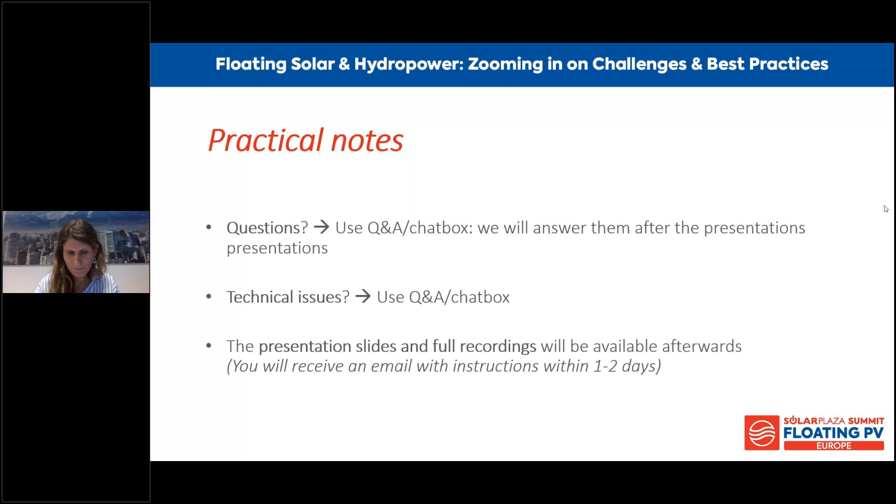But now I would like to introduce our speaker for today. It's Stéphane Prouvost. He is Division Director for Ciel & Terre. Hi, welcome, Stéphane. But I would like to say a few words about you first. He began his career in the marine industry and he joined Ciel & Terre in 2016 as European market developer. Then he went to India, where he's been establishing Ciel & Terre India. He also produced a 150 megawatt project, and he launched the R&D center in India that was focusing on new FPV designs. Right now, he's division director since 2021 and co-managing the floating project division worldwide.

So now, Stéphane, I'll let you take over and start with your presentation. Thank you very much. Thank you, Marjorie. Hello, everyone. I'm pleased to be connected with you today. So I'm just going to remove the video here. Okay, well, let's start.

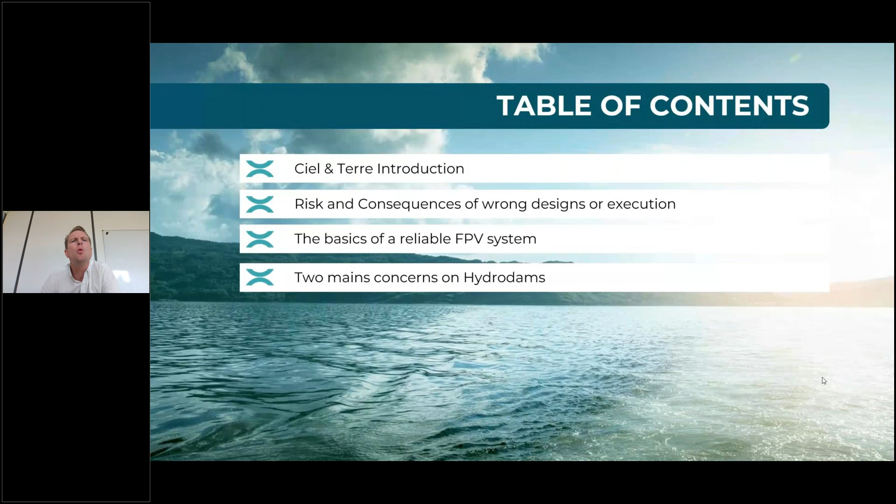So today I'm going to speak about the main technical challenges of floating solar on hydroelectric dams. I'm Stéphane, division director of Ciel & Terre. First I will briefly introduce Ciel & Terre. Then I will go to the risk and consequences of wrong design or wrong execution. I will then speak about the basics of reliable FPV solutions. Then I will jump into the two main concerns on hydroelectric dams.

So about Ciel & Terre, we commissioned around 300 projects in 30 countries for a total of about 1 gigawatt. We have 600 megawatt under construction, and we started our journey on floating solar 13 years back.

So we'll run a quick video now. Just drop me a message if it's not running correctly on your side, and I will just stop it and continue the presentation then.

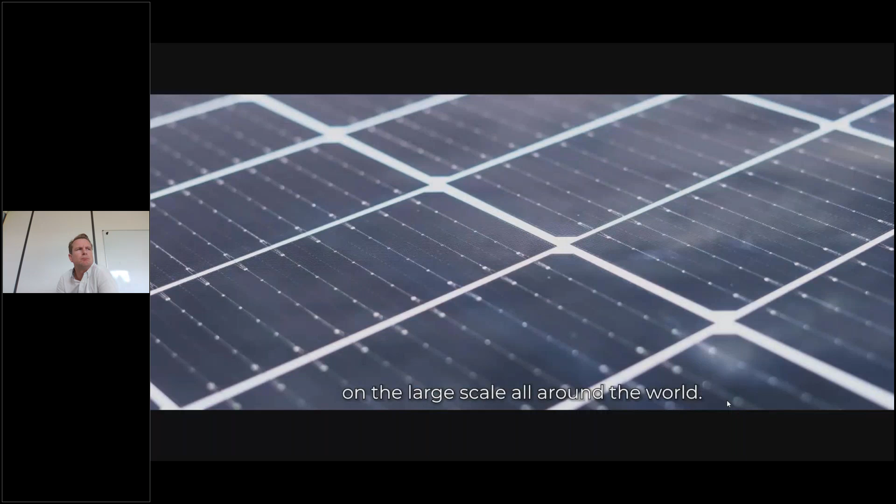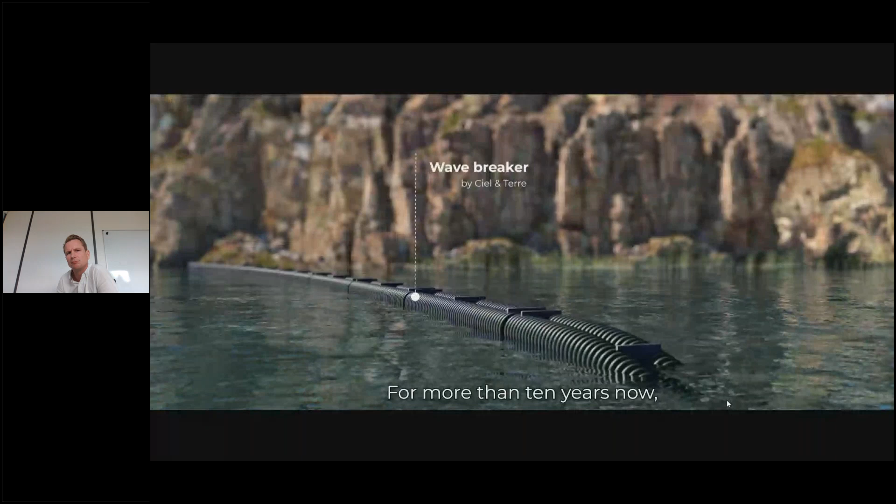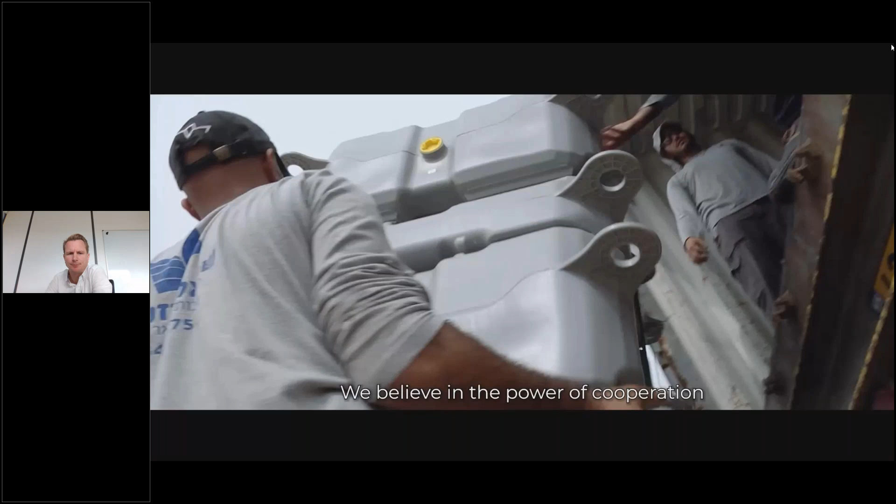At Ciel & Terre, we know that a sustainable world is still possible if we act now, on a large scale, all around the world. We make it our mission to deploy renewable energies and positively integrate them into the local environment. For more than 10 years now, we've been developing floating solar power solutions from design to distribution and installation. Because we know how much floating solar power has to bring, with its inland water potential estimated at 4,000 gigawatts. By using artificial ponds, floating photovoltaics solves land issues by preserving available areas, making it a smart renewable solution compatible with various pond types and activities. We believe in the power of cooperation and in the hybridization of talents to implement solutions offering ever greater promise and respect for mankind and biodiversity.

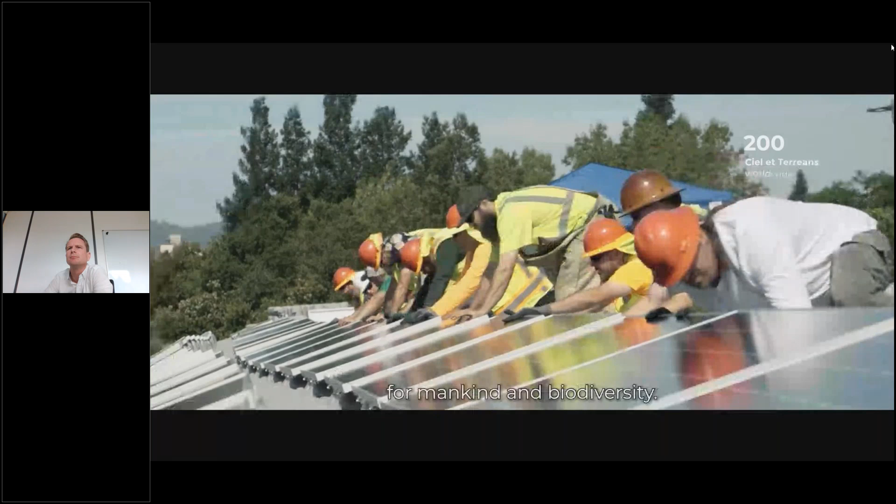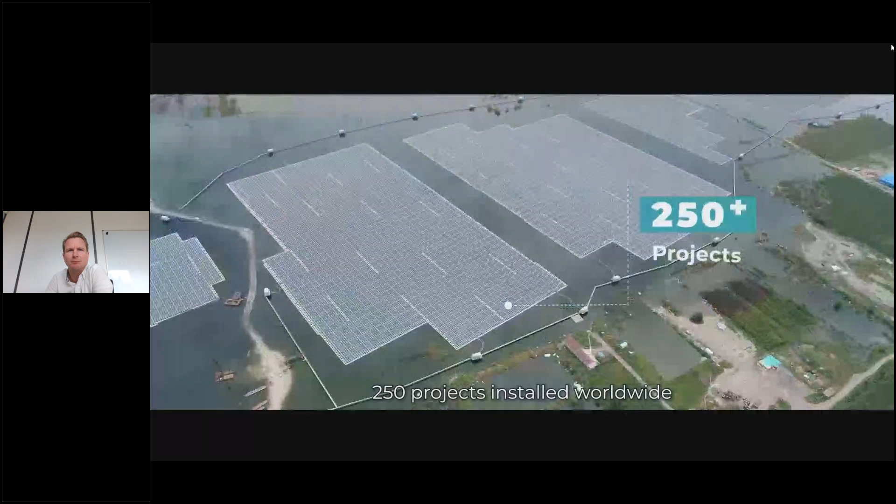It is by working with local partners spread throughout the world that we are able to build solutions that are both bold and diversified. With more than 250 projects installed worldwide, facing so many different conditions, from typhoon zones to high wave conditions, we have gathered a tremendous field of experience and technical know-how. This unique expertise makes us the world leader in the floating solar industry today.

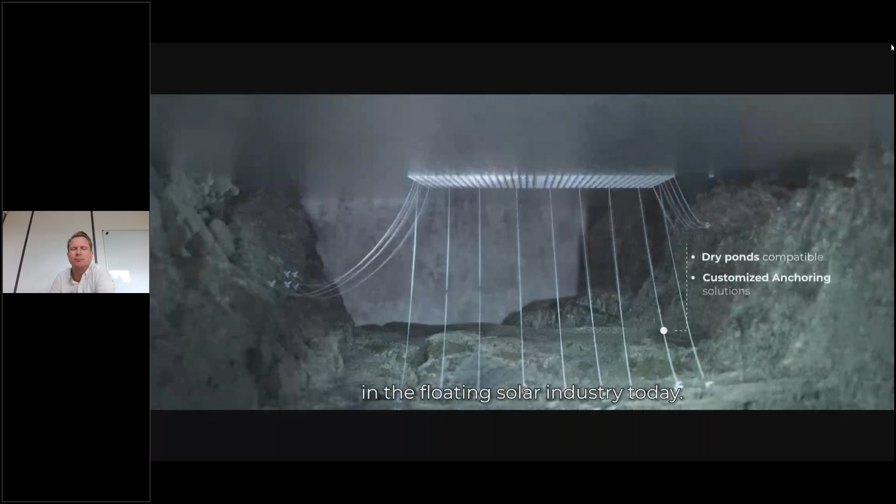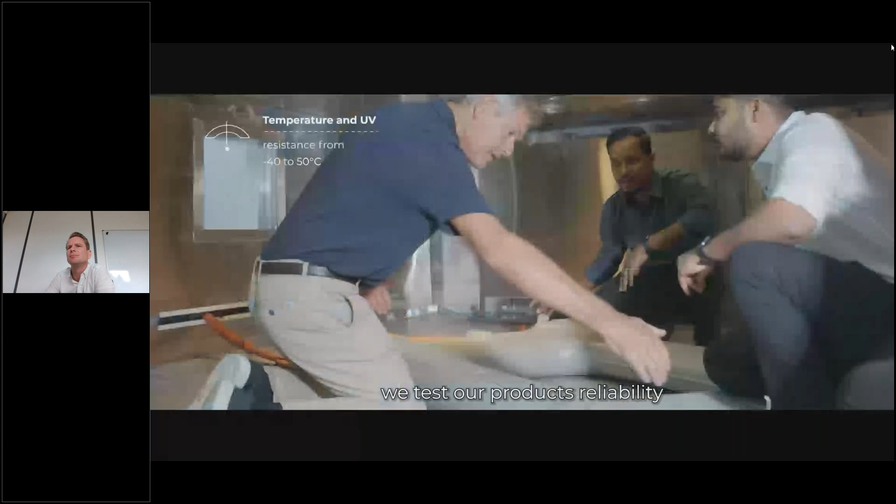But we will keep on taking on new challenges, because we believe in continuous improvement of our solutions. In our own laboratory, we test our product's reliability, setting durability criteria above the market standards and challenging our processes. We innovate with passion to open new, promising pathways, offering ever greater respect for both humanity and biodiversity, striving to optimize our solutions, our advice, our support.

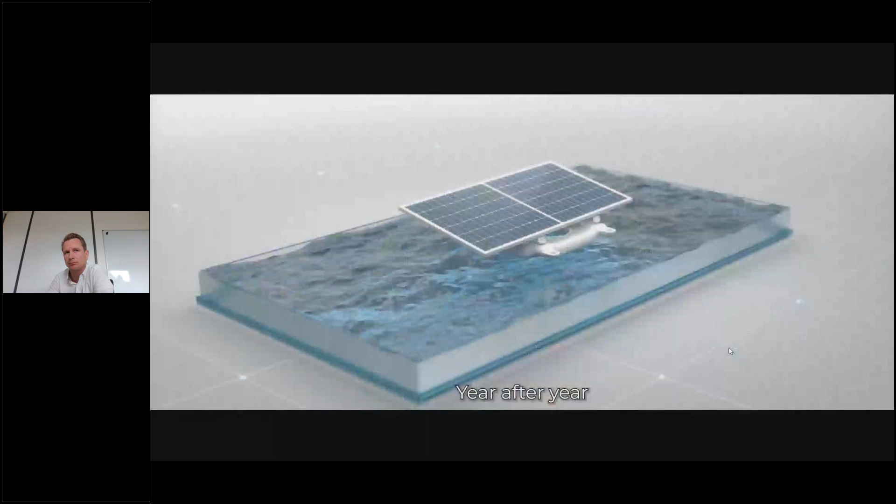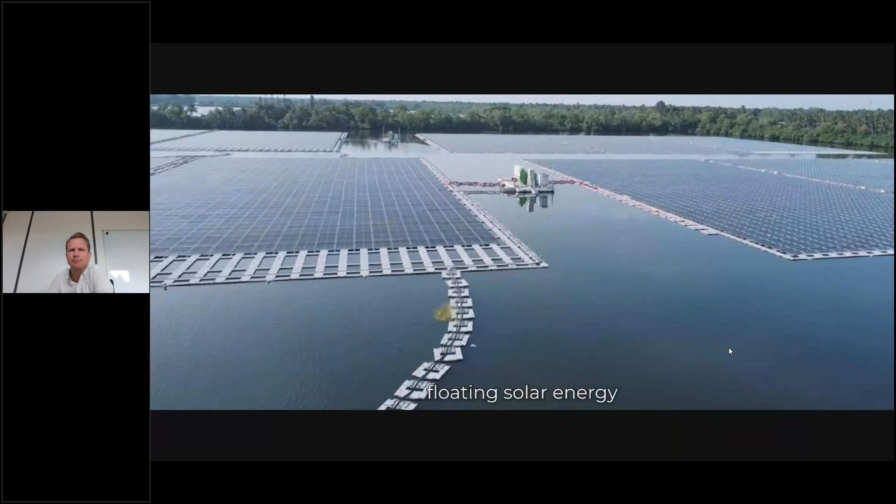Year after year, we challenge our products, our designs, and our mindset to meet new needs, to be more and more in harmony with the environment. We are ready to drive the floating photovoltaic market and deploy floating solar energy for the sake of our future. We know that solar power still has a lot to give, and Ciel & Terre has a great role to play. Join us in our human solar.

Yes, Stéphane? Yes, I'm trying to change the slides. It's not working for me now. I'm blocked. Okay, we will do it again. Just sorry for the people following us. It's gonna be back on track. Yeah, it's gonna show in a second. Okay, yes, all good. Thank you, Marjorie. I take the control. All good.

So, at Ciel & Terre, we did actually 6 projects on hydroelectric dams. The first one we did is in 2016 in Portugal for 200 kilowatt peak. We did another project in 2018 in Japan. It's 11 megawatts, called Yamakura Dam. Then we did in 2019 in Brazil a 1 megawatt project called Sobradinho.

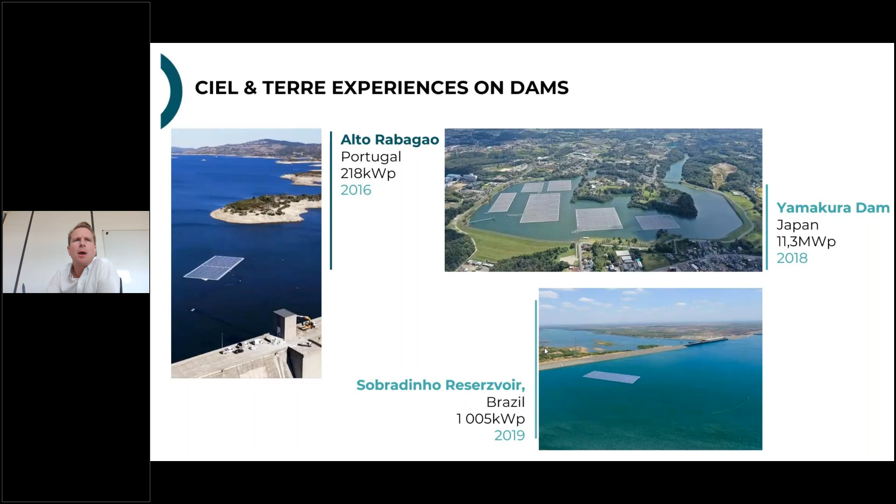Last year, we did a project with EDF in France called Lazer Dam, a 20 megawatt project. Then early this year, we did 7 megawatts in Brazil, called the EMAE project. And recently, we just commissioned a 120 megawatt project in India.

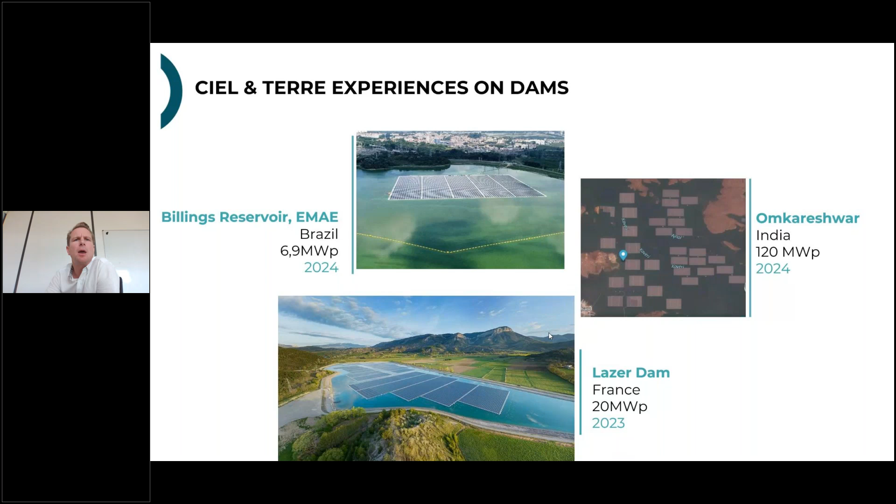So now I'm going to speak about the risk and consequences of a wrong design or wrong execution. So first, consequences could be a loss of generation. This could happen due to micro cracks on modules. It could occur when you place torsion on the panel or when you have water splashes.

Also, those losses of generation could happen when you have poor cable management or even a wrong module tilt, especially when you go for more than one in a row configuration, because you have extra buoyancy from the maintenance alley. So this could impact the tilt of the floats and then the tilt of the PV module.

So the consequences could also be an extra OPEX. This is due to component replacement, such as the PV panel and DC cable. Also, it could happen on the string inverter if you place your string inverter on the structure, as well as the PV panel fixation system, for instance. So yes, it could have a significant impact on the OPEX.

Also, a consequence could be water pollution. This could be due to a wrong polymer formulation, especially if you use a wrong UV stabilizer. We have what we call the chalking, especially on polypropylene parts. After a certain duration, UV starts to impact the polymer. And then you have this powdering forming on the outer surface of the part, and those powders are dropping in the water and polluting.

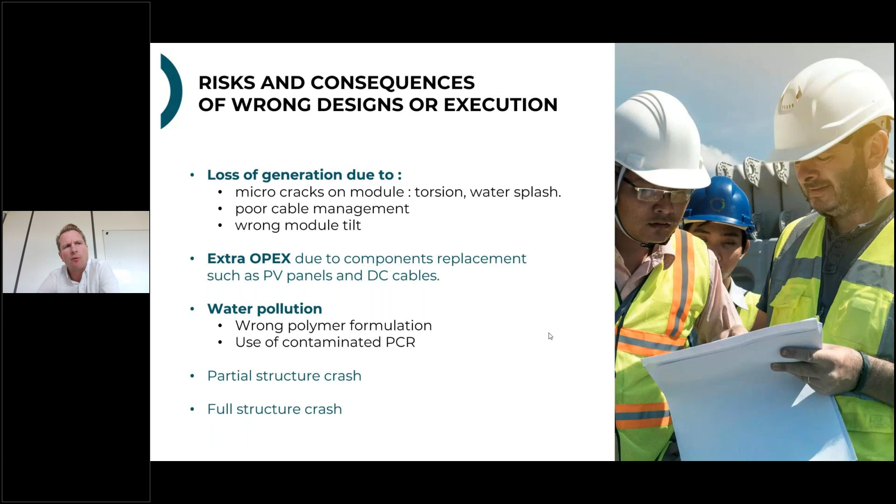And knowing that it has to last for 25 years, we think that it will even increase. The percentage will increase. Now it's about 4%, but we can extrapolate for 25 years, and I think that we'll have more than 10% of big damage in the coming years. So I just wanted to highlight the risk here. When selecting the technology for your project, please be extremely careful.

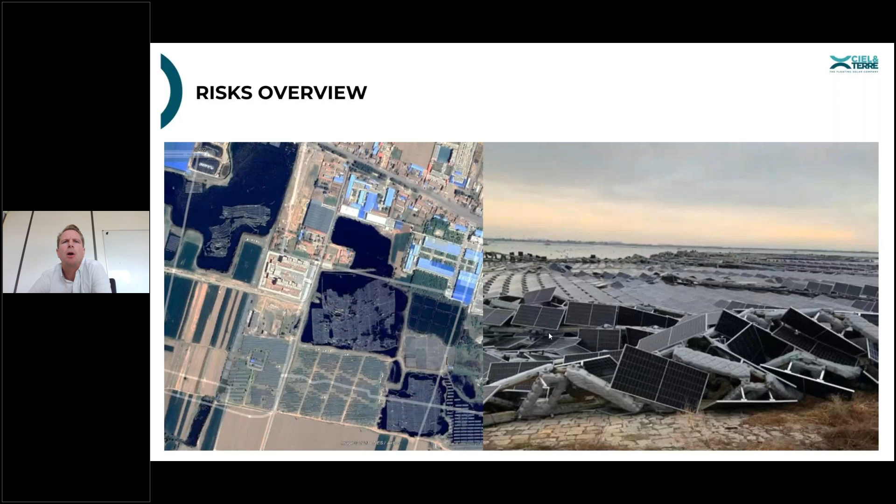So here, the failure point. We see often that the failure point is the connection between the floats or even the connection of the mooring line. Why? Because you have high concentration of loads. So it could happen here. We see a picture of one of our competitors.

On the mooring line, we see a picture here of a steel mooring line. And we see after already 3-4 years, if it's not protected correctly, we see high corrosion, and the cables are breaking. Same for the ropes. We see internal abrasion. So in Ciel & Terre, we do select carefully the fibers to be used.

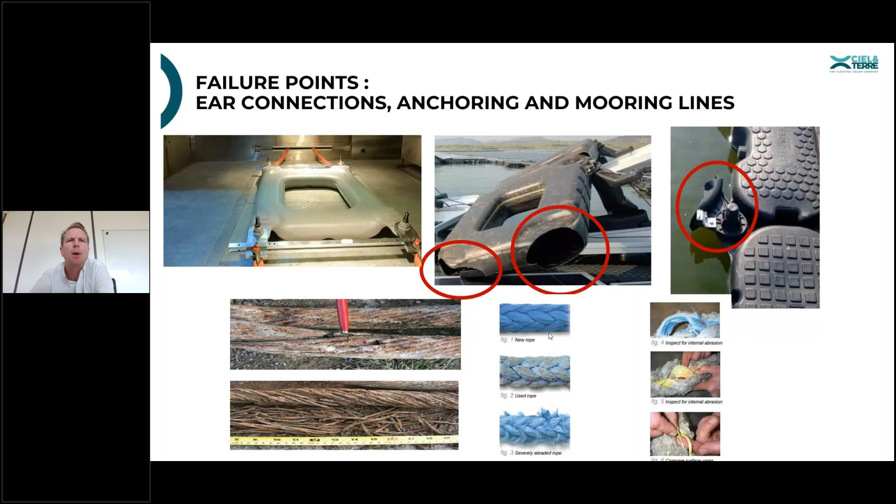So what are the risk consequences of wrong design and execution?

So, sorry, I think it's lagging slightly on my side.

Yeah. Okay. Just to say that we need to qualify the product to ensure a good project, quality project. So I wanted to say that the theoretical calculation is not sufficient. We need to assess with physical tests to understand the limit of the design, the limit of the product you have. So we see on the top left picture that this is inside our lab.

We see in the middle here that we have a panel fixation test. So here we are pushing and pulling on the PFS. What we call the PFS is a panel fixation system, for millions of cycles. We have all those cycles mostly from the wind, also the waves. So we need to analyze what is the fatigue of this fixing system on the float itself.

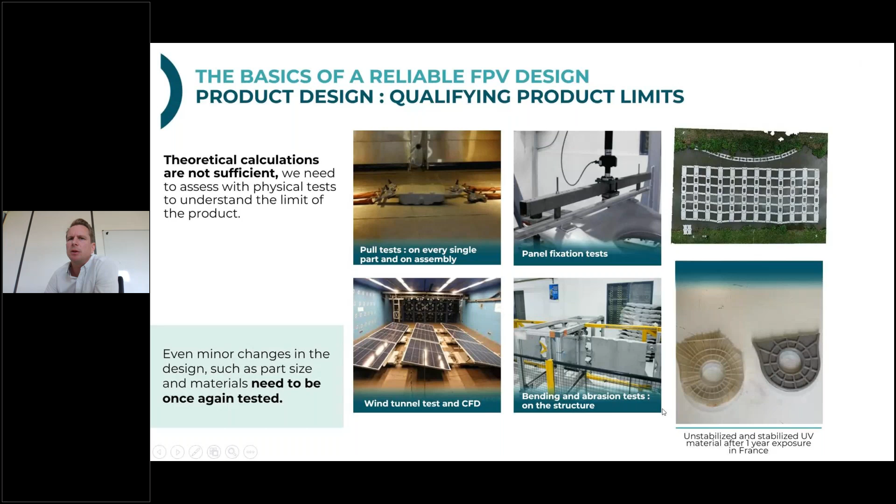On the bottom right here, I will run this quick video. I'm not sure. Yeah, is it working? Yeah. Wow, we can't see much.

Actually, just to highlight the importance of having the right UV stabilizer. You see that only after one year, if the material is not properly stabilized, it's becoming really brittle and it can easily break.

Okay, video is not working. Fine.

So yes, even minor changes in the design, such as part size and material, have to be analyzed once again. You can't just simply change the design and assume it will work. You need to test.

Okay, next slide. I would like to go to the next slide. It's not moving on my side.

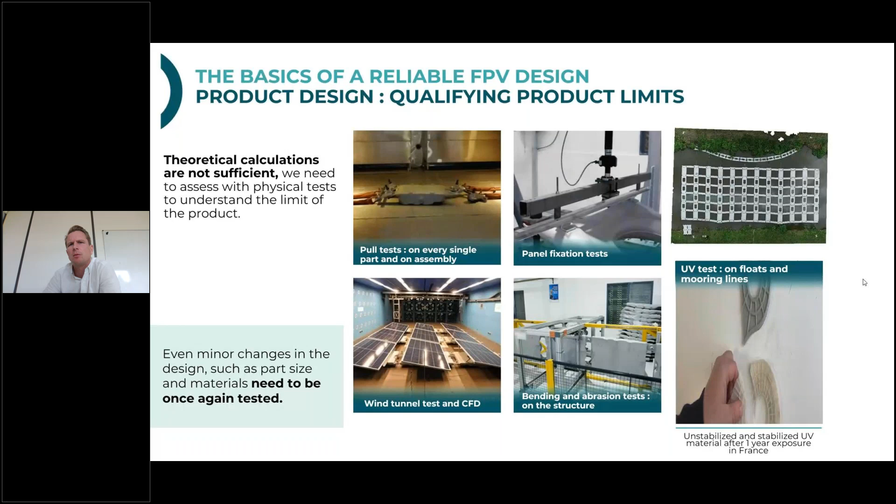Okay. Yes, this is about the project design. Because first you need to understand what is the limit of the product, but then you need to adapt the product to the site, see what constraints you have at the site and make sure that your product could fit that specific site. So at first you have to evaluate for this site what is the environmental load to be considered.

So yes, selecting the right wind return period, the right wind speed reduction, because often the wind speed is at 10 meters high, but you need to reduce it to the panel height, which we often consider 1 meter in Ciel & Terre.

Also, one big parameter is the gust wind. We see that gust wind has a big impact on the wind to be considered. Whether you go for 30 seconds, 10 seconds or 3 seconds, it has a big impact on the maximum wind to be considered. So this is for the wind.

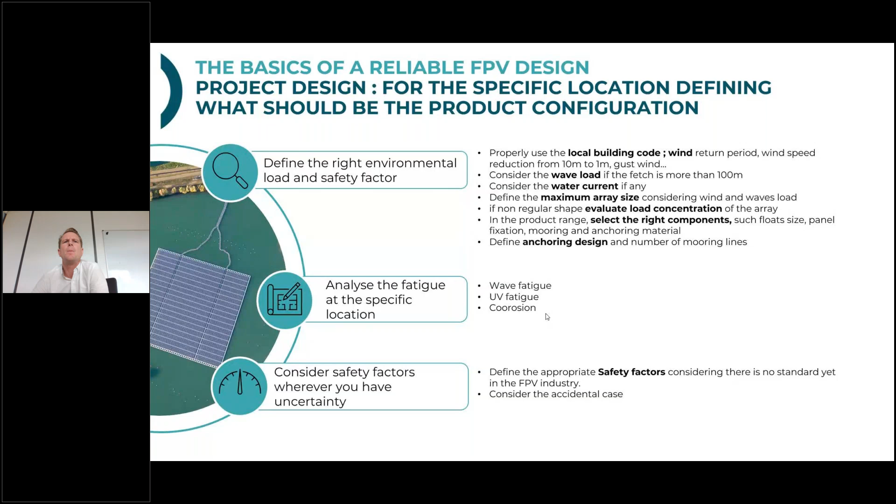When it comes to project execution, of course, you need to follow the manual instructions. We often see that subcontractors of our customers are not always willing to do it. They want to save time or money, so they compromise on quality. So it's extremely important. Another extremely important point during project execution is to minimize the construction time of each array to avoid temporary anchoring for a long duration.

Why so? Because if you face high wind speed during construction, you have only temporary mooring lines, and you connect only a few fixing points on the array. So if a high load is applied, mainly due to the wind, it will be too high and the temporary mooring lines will break. So it's extremely important to be fast enough to avoid any big crash during installation.

Of course, we have to ensure that all components and materials are the same as those mentioned in the datasheet. We see competitors incorporating recycled material during manufacturing. Why so? Because everyone is trying to save costs. So as a customer, you should be careful. You should control what your supplier is doing during manufacturing.

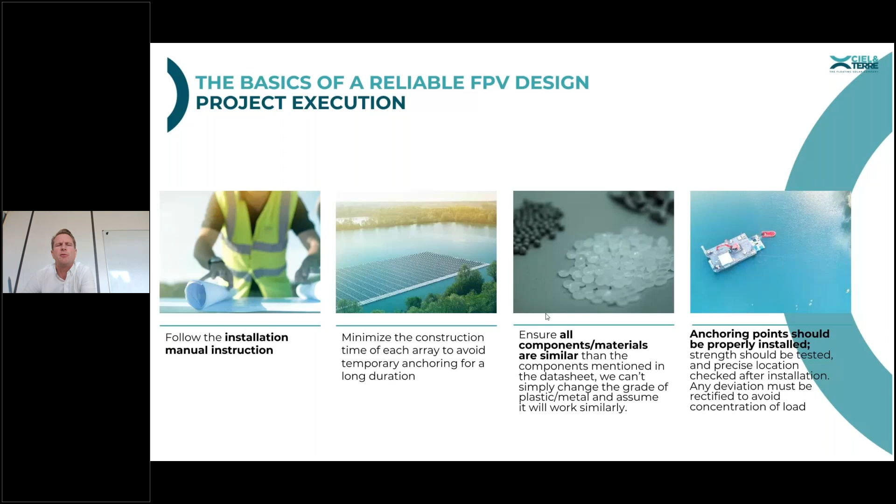The last point I wanted to highlight for project execution is the anchoring. We always check that the anchoring points are at the right location. If you don't place the anchor at the right location, you are overloading a few mooring lines, and you need to ensure good distribution of the load on every mooring line. If they are not all aligned, there is overload on certain mooring lines while others are not working, and it could obviously fail due to that issue.

So I will now go on to the two main concerns on hydroelectric dams.

Stop the video. Yeah.

Sorry. So often on hydroelectric dams, we always see this big reservoir. It's an extremely big reservoir. For instance, on the picture here, this is in Portugal, the Alto Rabago project. There is a really big distance between the shore and the dam, what we call the fetch. This is 7 kilometers, but often we can see even more.

In big projects, big hydroelectric dams, we see like 20 kilometers, 30 kilometers, and this leads to big waves, mainly due to the wind, because when it's blowing here, for instance, from the east side or northeast side, then you have accumulation of waves due mostly to the wind.

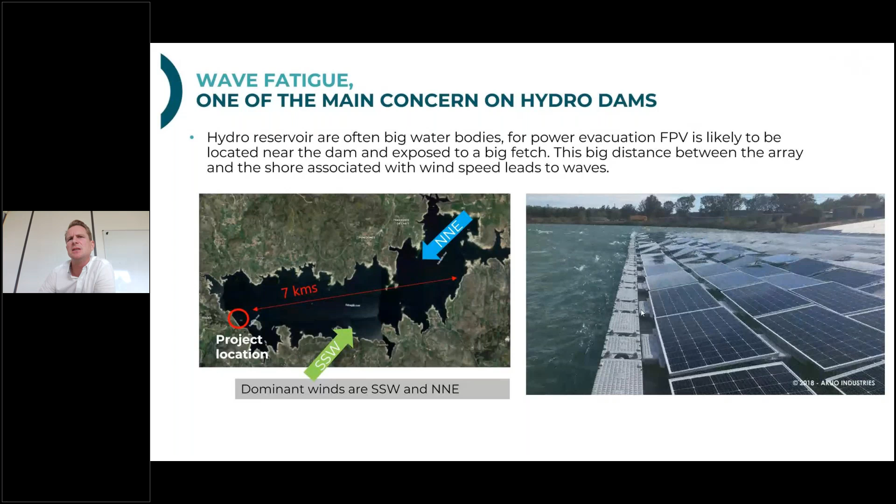So you can see quickly here on this video on the right side, if it's working for you. You see a lot of movement, right? Because it's a flexible structure. And of course, this leads to fatigue after years. So for that, we need to analyze what will be the fatigue after 20 years.

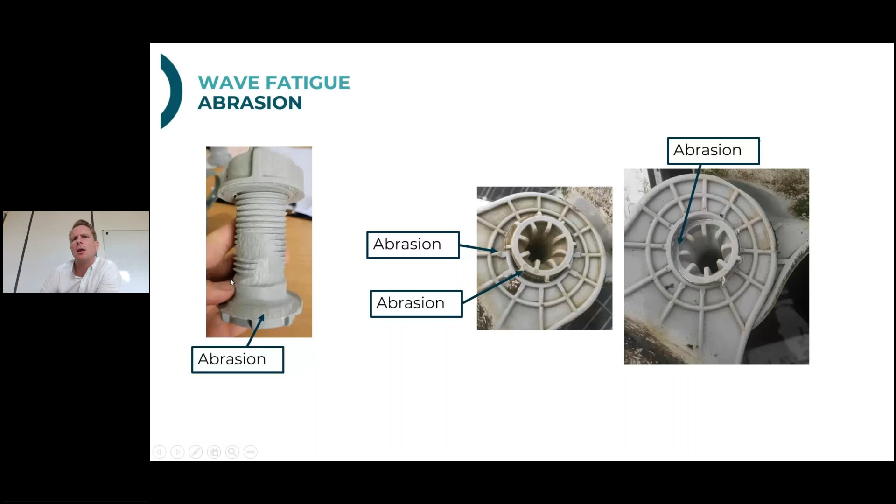So this is the kind of damage that could happen if you are not careful enough, if you are not protecting the array, the structure itself. We see important abrasion happening on those screws, what we call the connection pin, and also on the connection point, the ears, which are connecting the floats together.

Also, we see cracks happening, cracks on the ears, because you have compression stress on the upper side and tensile stress on the bottom side. So when you have millions of cycles like this after years and years, the material gets damaged with too much stress on it. So yes, this has to be analyzed also.

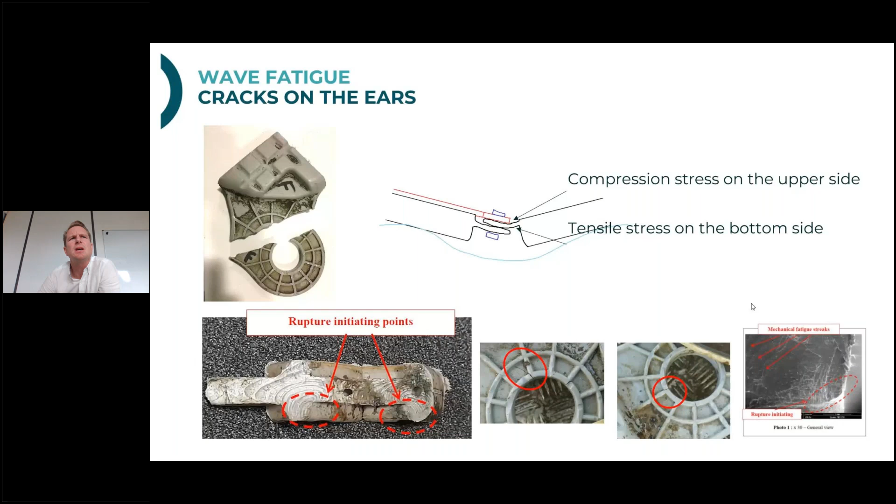Sorry, about the wave fatigue here in Ciel & Terre, what we do, we try to predict what will be the damage. So we consider the inputs from site, so the wind speed, the wind direction, the wind occurrences, and the associated fetch. According to that, we can evaluate what is the wave spectrum, and then calculate the float movement and angle.

Thanks to our lab fatigue test results and the experience we have on other FPV installations, we can predict the damage. So we see on the bottom left here the number of cycles. This is what we do in our lab with a specific angle, and we see how many cycles we can apply before the ears are breaking.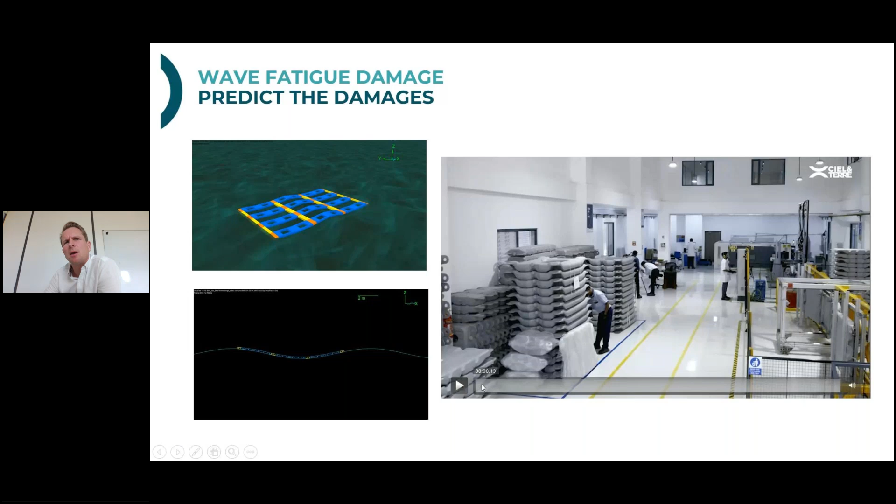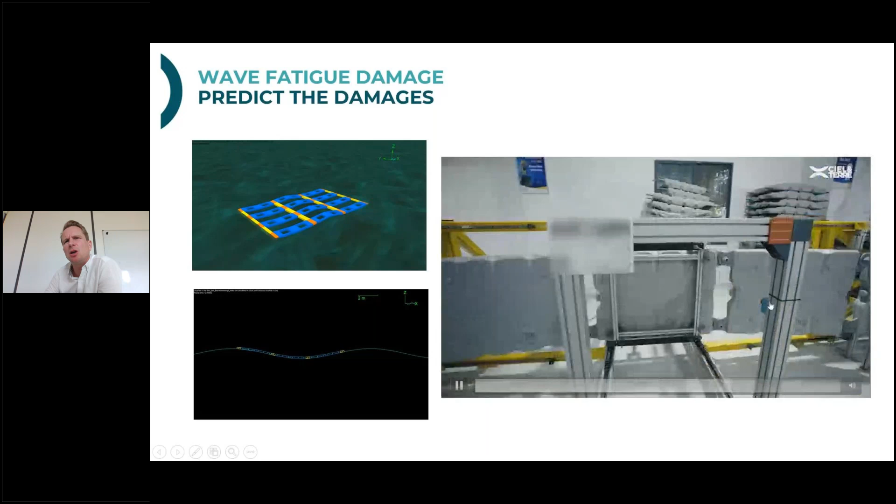Yes. Okay, and here we see our lab, where we have a machine. Let's see if it's running. Okay, so we have this here. We apply millions of cycles on floats. So we connect floats together, and then we have a piston where we apply millions of cycles with a certain tension on the float, to understand what is the fatigue with a certain angle and certain number of cycles.

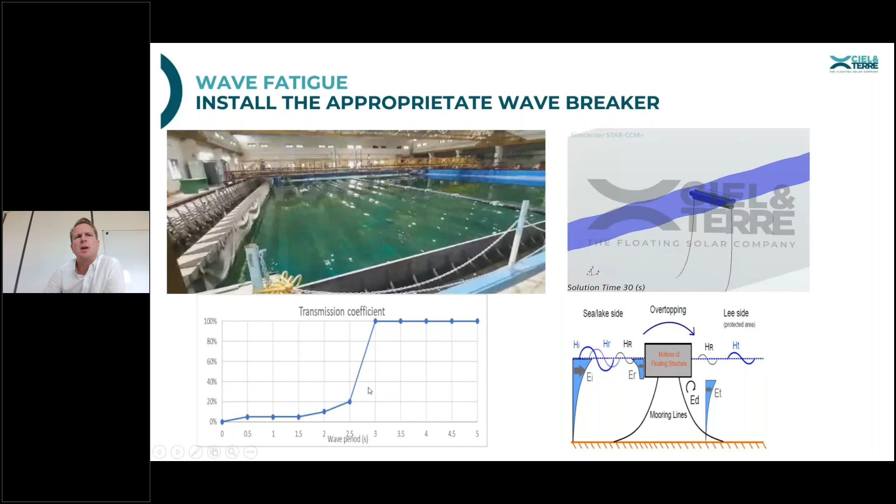When designing a wave breaker, there are different parameters to consider: the pattern configuration, the draft and the depth, and the weight of the wave breaker also has an impact. So we consider all of that when designing our own wave breaker. Why does Ciel & Terre design our own? Because it's difficult to find a competitive floating wave breaker with good efficiency, so we decided three years back to develop our own solution.

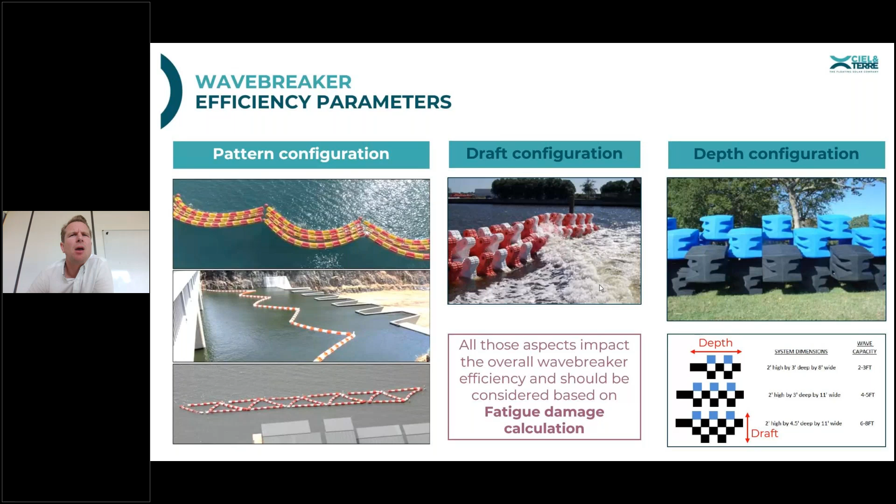The second challenge for hydroelectric dams is the anchoring. First, we have high water depths, and when you have high water depths, you can't use normal techniques. We used to do anchoring from the top surface, having a barge and placing screws with a mast from the barge down to the bottom of the reservoir, but when you have high depths, you can't use those techniques.

So that's why you need to use robotics, and for that it's a bit specific, which complexifies the process.

Also the high slope. Hydro dams are often placed on what used to be a valley, so you have high slopes at site. Placing a big dead weight is not reliable — we see that it's sliding when you have a high slope of 20% or even more. Then with the tension on the mooring line, it could slide the dead weight, so you need a specific technique. At Ciel & Terre, we screw or rock bolt our anchors to avoid any slide of the anchoring point.

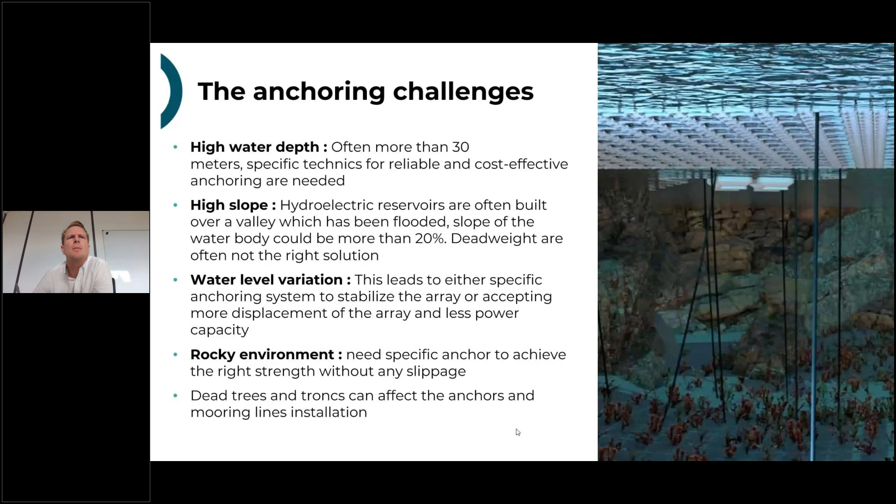One last point, pretty important to consider, is the uneven bed of the reservoir associated with water level variation. Why so? For instance, on the right side picture, when the water level is high, you see a good distribution of load on both mooring lines. But when the water level goes down, the bottom line gets loose, meaning more load is applied on the top line. And if there's too much concentration of load there, it will fail.

So this is extremely important — we do complex calculations and use specific software to define the right location to place the anchors.

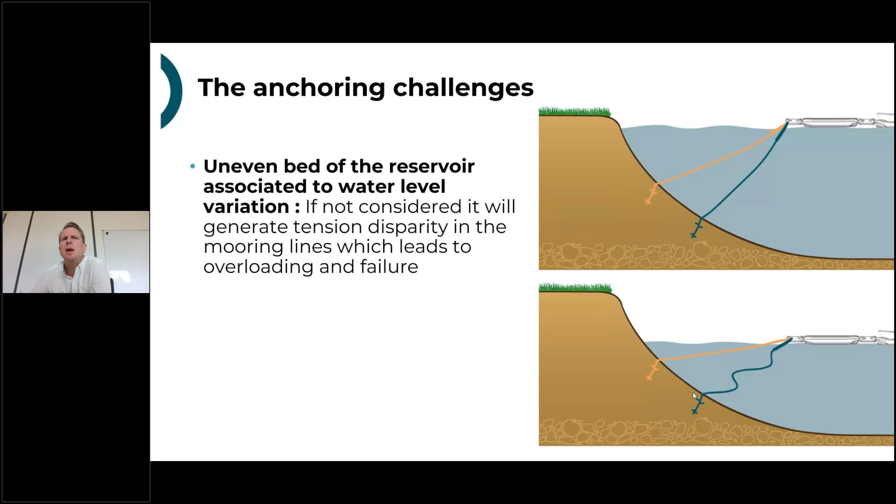Now I'll go to the conclusion. FPV on hydro dams is surely a great idea, especially because there is such potential on hydroelectric dams — it's such a big water surface that we can make gigawatts of projects there. However, there are many technical challenges to ensure the integrity of the structure for 25 years and even more.

Not yet finished — to define the right floating structure, we need a proper fatigue analysis. This is extremely important; each site is specific, and we need to carry out proper analysis and studies. Final point: when the distance between the array and the shore is big, the installation of a specific wave attenuator should be considered. Okay, I think that's it on my side.

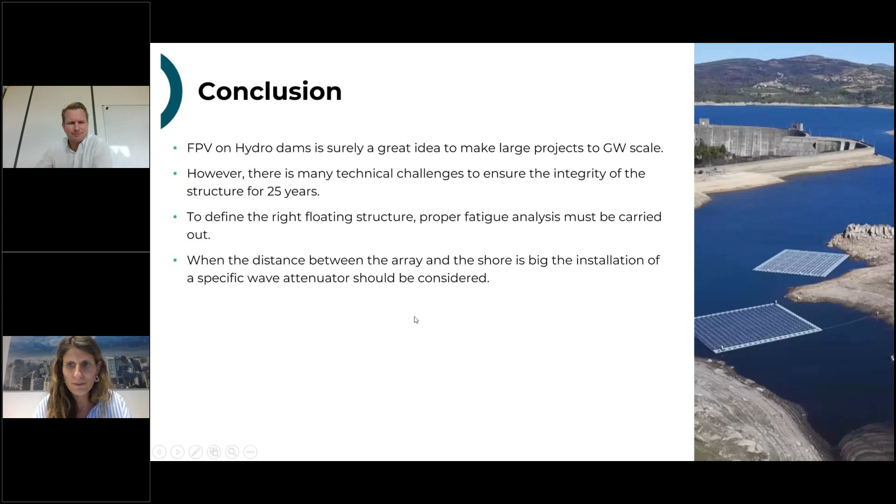How important are geotechnical studies for the anchor points, and are pull tests and tensile tests of the mooring lines sufficient without obtaining subsurface soil properties? Yes, of course it's needed. We always ask for this data when starting to design the anchoring solution. Still, even when you have geotechnical and SPT, what we call a standard penetration test data, it's always good to make a trial at site to understand the exact load you could apply on your anchoring point. But yes, of course it's needed to evaluate the feasibility of your project. That's one of the first pieces of information we always ask for.

Okay, so you presented a slide on the anchoring challenges, and the question was whether you have developed a vertical mooring system. It's not a vertical one, sorry, maybe I wasn't clear. We developed a system where we could drill into the ground, especially into rock. When you go to a hydroelectric dam, it's often a rocky environment because it used to be a valley before the hydro dam, so all the silt has been removed and only the rocks remain. So we developed a system to drill into the rock to place our anchors.